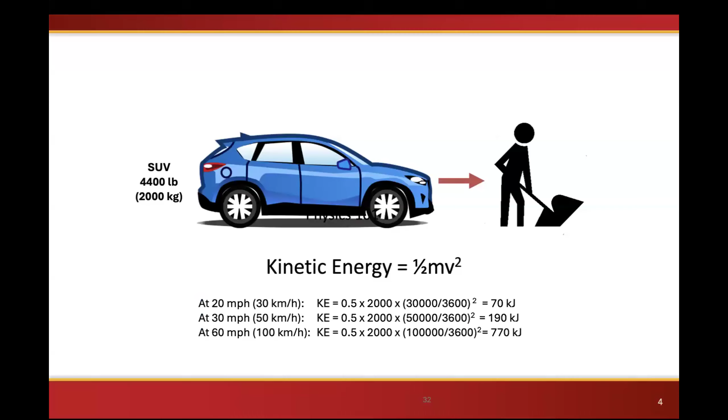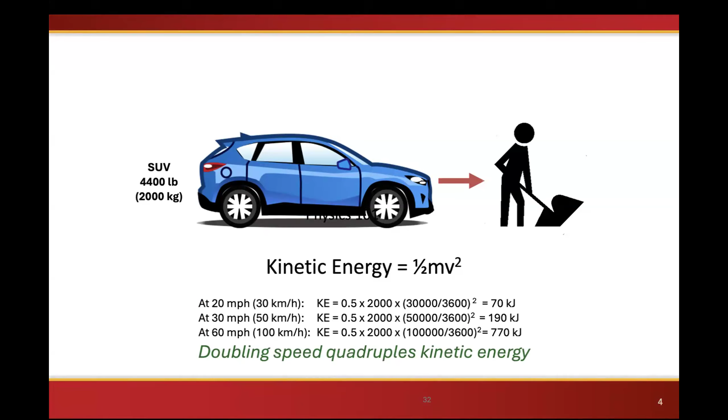And again, how we talk about this, how we have the common language, words matter. It's important. It's not my car hitting the pedestrian, it's myself driving and the speeds that I'm driving at and what is the effect on others. I do know that it is not possible to have 20 miles an hour on all of our rural roadways, but where does it make sense as we're looking at those safety risks that go along with it?

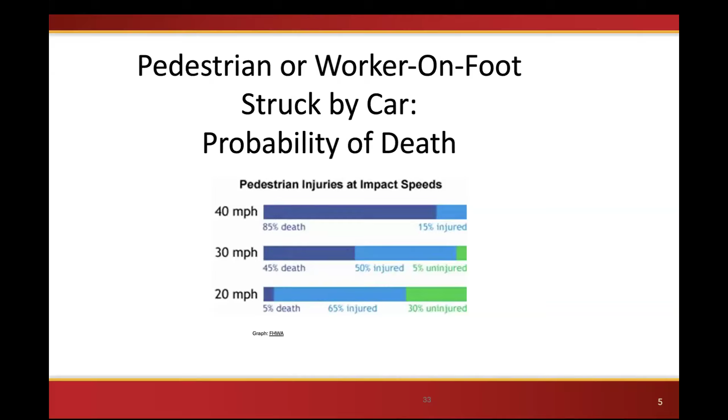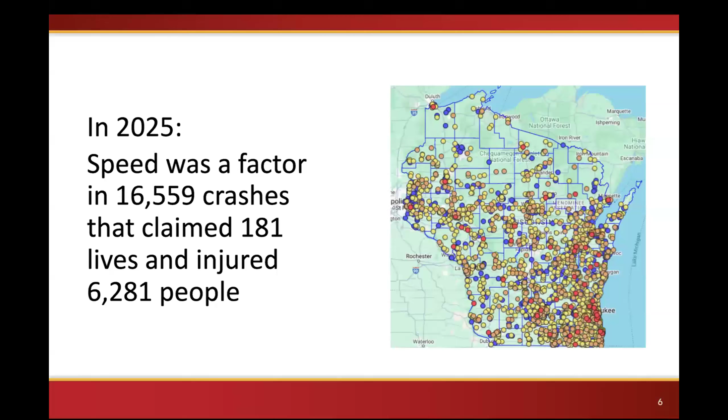As we are getting towards zero deaths in Wisconsin, we have to do better when it comes to speed on our roadways. When we look at the actual speed on our roadways, we have a lot of continuous data counters throughout the state. What we see here is roughly 3 out of every 4 vehicles are above the posted speed limit. Digging into that a little bit more, where does that break down? I have a whole speed soapbox, so bear with me here on this one.

Especially in Wisconsin, the speed limit is the maximum. So I know we say, okay, well, 5 miles an hour, Andy, is okay, and 9 is fine, 10 you're mine from a law enforcement perspective. But if we're just looking at the data, we see here in 2022, 76% of our vehicles were over the speed limit. When we look at our 20 plus, with limited data, you do see that spike in the COVID timeframe, but we're right back down to 1.74% on that large side.

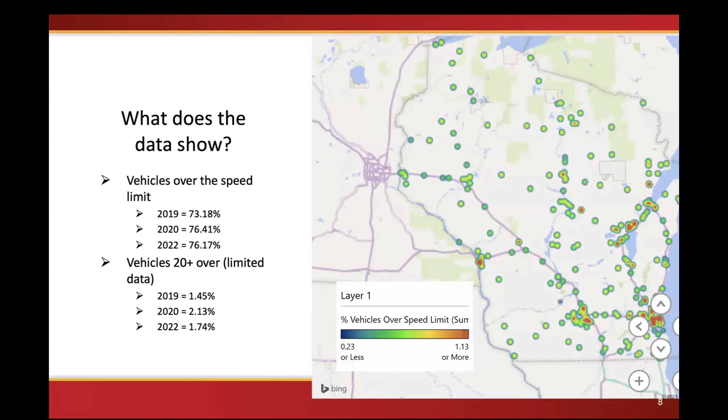So at least in my area, it's how do we start to think about not just that excessive speed? We always get into this: well, Andy, I'm a very good driver. It's not my fault. I can travel safe at 5 or 10 miles an hour over. It's those people that are always excessive speeding that are causing the problems. Yes, they are, but it's also all of us. And how do we look at that culture that we have?

So we're going to keep that excessive speeding in the back of our mind, but I want to set that aside for right now and talk about our everyday life and things that we can do. I've had the opportunity to do a Mentimeter with a lot of different groups: different types of judges, driver education teachers, engineers, law enforcement educators, and analysts, and asked them their opinions about speeding.

We asked questions such as, if the speed limit's 25 miles an hour, at what speed do you normally travel? It's anonymous, so they felt comfortable giving their answers. A little bit of a shot to the heart was that no one said they traveled right at the speed limit. At 25 miles an hour, people felt pretty comfortable going about 5 to 7 miles an hour over. On our interstates at 70 miles an hour, people felt pretty comfortable going 12 to 15 miles an hour over.

Well, we looked at it, and it didn't matter about your background, but speed perception varied by audience. We did see a difference between the public versus professionals. Overall, people underestimated the risk at moderate speeding levels.

Again, it's my old age showing, you guys can't see my gray hair, but it's kind of that Rain Man syndrome of, I'm a very good driver, Andy. It's everybody else that's causing it. I feel like I'm very competent at speeds where I can do it, not understanding the full data about it.

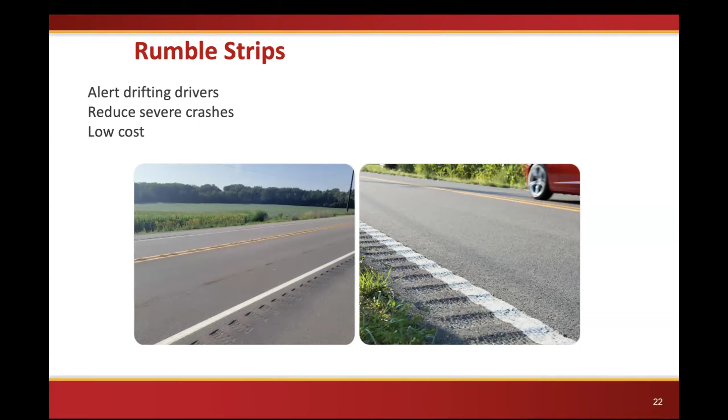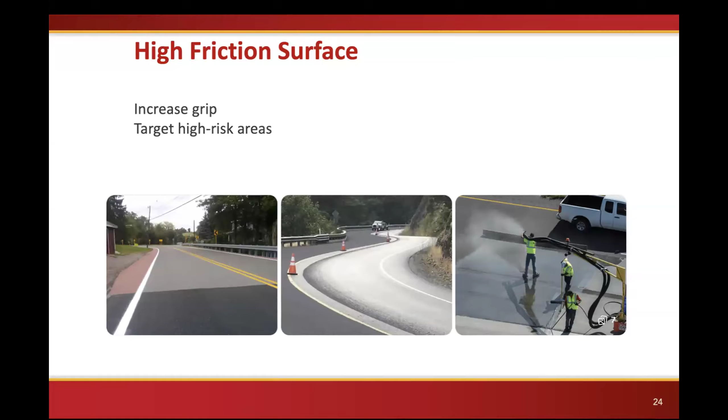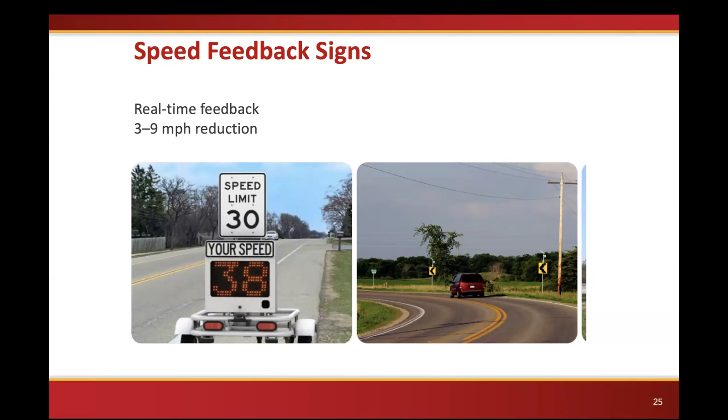I had an example of a sheriff who said they could see about 2 o'clock every weekday there was a car going through at about 120 miles an hour—over. They said, well, maybe that was a glitch for a couple days. Then they said, okay, we're just going to assign an officer out there. There was somebody coming home from work who always sped on that roadway. So they were able to utilize the data and look at it. They couldn't give a ticket based off what they saw from the data, but they could know when to enforce and what they should be looking for. So again, another helpful piece in being able to look at that. We can't have enforcement everywhere in our rural areas, but are there ways to do some targeted enforcement based off some of this data and analysis?

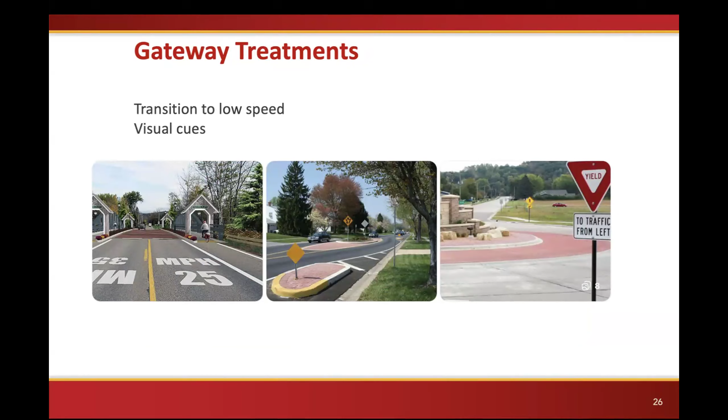In a lot of our rural areas, we go from a rural highway into a more city, village, or town setting. There are different options to transition to a lower speed roadway—we can do some roundabouts, some signage, elongated pavement markings, and other options like chicanes that are out there. So as you're thinking about your roadways, those two-lane rural roadways, and as we're transitioning to something where we know we're going to have a lot more interaction with our pedestrians and bicyclists, how do we transition and look at those options?

Take a deep breath. I get really excited about this stuff. There's lots of technology out there.

As we think about this and look forward to the future, how does this work? There are active and passive intelligent speed assists out there, different examples of this, and different studies that have been done nationwide with regards to this. There's also just cities and towns that are looking at slower speeds in general.

Are we seeing all of the vehicles down to 20 miles an hour yet? No. Are we seeing a statistically significant decrease of about 3 to 5 miles an hour over the previous years? Yes, and it continues to go down. So we're seeing that decrease.

I know it's easy to say, well Andi, we can just put up signs, no one's going to listen to it. But again, over time, changing that culture along with the enforcement, the engineering, and the education changes that culture that goes along with it. The other option is looking at different pieces of technology.

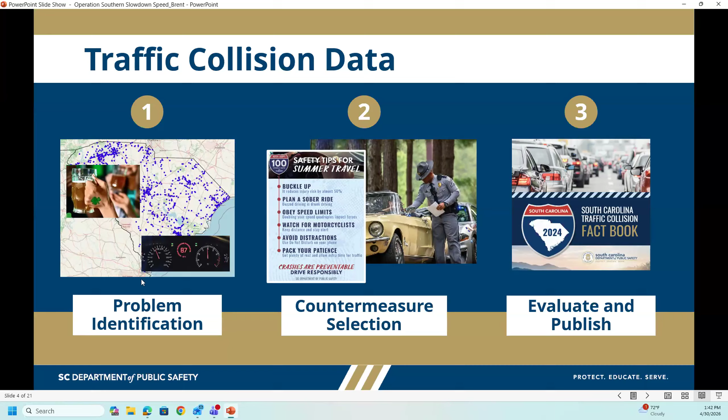And then we take this problem identification and this countermeasure selection, and then we include it all into our fact book. And that's where we evaluate the data. We evaluate the crash data in the state, and then we publish it to let everybody in South Carolina, and whoever else wants it, be able to see where our problem areas are, and they can use that and take it to their own jurisdiction and maybe implement their own plan, or maybe implement their own campaign and be able to target the areas that they are having issues with in their jurisdiction as well.

So in 2025, these numbers are preliminary, but as you can see, we had roughly 136,000 collisions, 945 fatalities, 16,000 DUI citations, 63,000 seatbelt citations, and 245,000 speeding citations. Again, these are just rough numbers that I wanted to share with you.

But one thing where I think we fail a lot, whenever we're trying to educate and talk to the public about highway safety and things like that, is we fail to share the economic cost involved in a crash. And that's one thing I encourage my guys to do, whenever they're doing a safety presentation or have the opportunity to talk to somebody, is to include this, because I think this is a big eye opener. Because people just look at the crash data and they think, okay, unfortunately somebody was seriously injured, or unfortunately somebody lost their life, but they don't look at the overall picture.

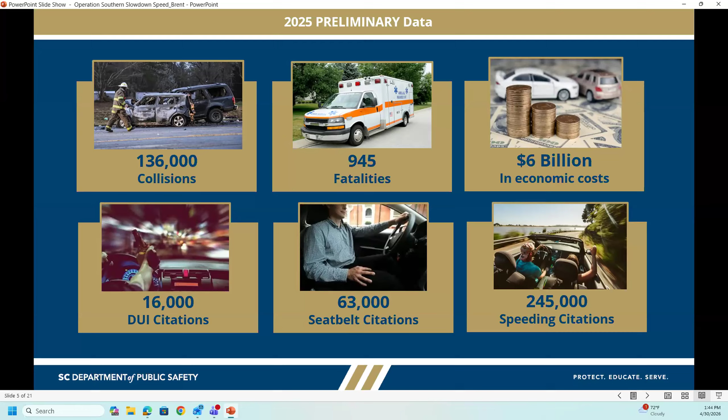And economic costs include medical bills, vehicle property damage, hospital costs, lost wages, decreased productivity, legal and insurance fees, societal burdens, public health support, long-term disability, things like that. And as you can see, the 2025 preliminary number for that was $6 billion. And like I said, that's a real big eye opener for a lot of people, because they don't look at the cost involved in a collision. So that's what we try to share any chance that we get as well.

And so looking at some crash data trends for us here in South Carolina, as you can see, we went all the way back to 2014 to show what we've done over the years. And, of course, 2014, 823, and then we saw an increase from there up. But in 2021, we saw our highest number of fatalities on record for the state of South Carolina.

And then after 2021, it starts decreasing a little bit. I've also included the serious injury graph there for you as well. The graph is almost identical, as we all know, and I'm sure your graphs and your data are probably similar too for your serious injuries and fatalities. But as you can see, we have started doing better over the last couple of years.

But 2021, I think everybody had a problem that year. At least I know our part of the country had problems that year regarding fatalities and serious injuries, and just an increase in everything, because we all know why. If y'all dealt with the same thing that we dealt with whenever COVID hit in 2020, and I hate to keep bringing that up because I'm really about tired of talking about COVID, but for us, that was the issue, and that's why we saw the increase in 2021.

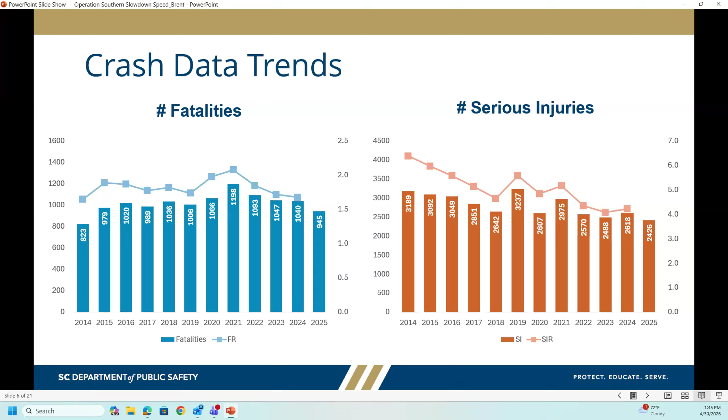And the reason being is because a lot of our agencies were told, only do traffic enforcement on those major violations. So I think a lot of people, like I said, in our part of the country were doing the same thing, and that's why we saw that increase during that time frame.

So as far as our traffic fatalities, we are third in total fatalities, and this is per 100 million vehicle miles traveled. So that's what we compare this to, and this is nationwide. So South Carolina, we're ranked third in total fatalities. We are ranked first in alcohol impaired driving fatalities. We are first in speed related deaths, third in pedestrian deaths, eighth in roadway departure deaths, eighth in intersection related deaths, and ninth in unbelted occupant deaths. And again, that is based off the 100 million vehicle miles traveled.

And it's always good to be in the top in a lot of categories, but these are categories that we're not very fond of, and we don't like being in the top of. So again, this is another reason why Operation Southern Slowdown is very important to us as well, to encourage our law enforcement partners in the state. I know this campaign is only for a week, but we always encourage them, don't stop during that week. This is something that we just need to continue to do throughout the year. We still need to work together and partner together to keep up with the speed enforcement throughout the year, because we don't want to be at the top in these categories.

So we use a lot of our strategies based off of our strategic highway safety plan, which Andi mentioned as well in her presentation. So we do the same thing, I think, just like a lot of the other states do. I'm not going to sit here and bore you on the SHSP, because everybody has one, everybody's familiar with it. But we use that and share that with the public and with our stakeholders as well. And we partner with them, whether it's DOT on the engineering aspect, or the Department of Motor Vehicles, to keep that partnership to help maintain our roads and make our roadways safer. We do that by using this plan.

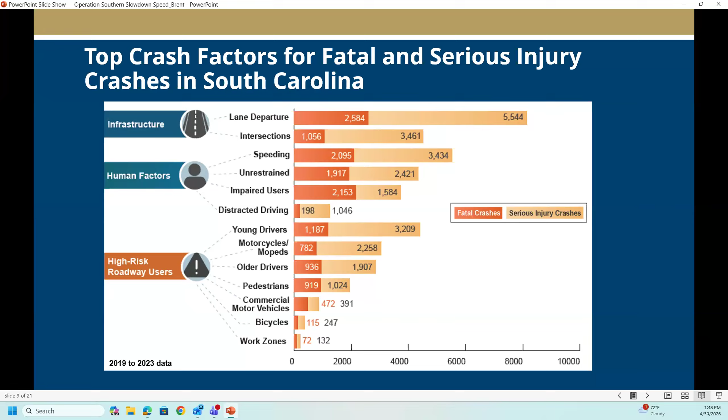So our top crash factors for fatal and serious injury crashes in South Carolina, as you can see, speed is at the top, like I mentioned a couple of slides prior. Five years of crash data were examined, focusing on fatal and serious injury crashes for the top factors. The factors are our emphasis areas. The overlap in contributing factors totals more than annual fatality and serious injury counts, because a crash can have more than one factor. And speed is our number 2 emphasis area, and is also the area with the greatest potential from a safe system approach, because of the number of countermeasures available from education, engineering, and the enforcement component.

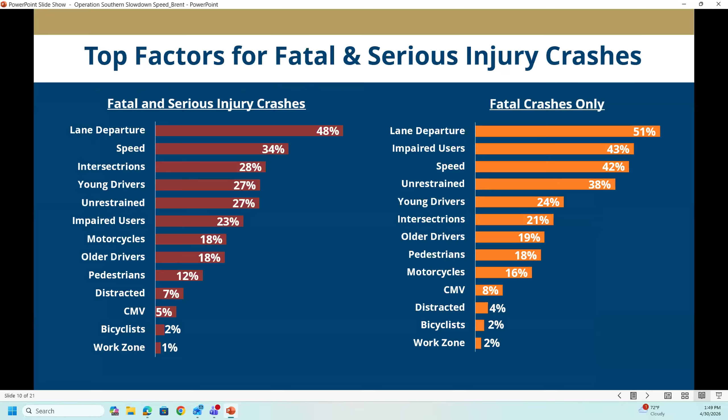And this is the same as the previous slide that you just saw. It's just shown in a different way. It may be easier to understand, simpler to look at this way, but it's basically the same slide that I just showed you and explained.

So the safety features that a lot of the companies and a lot of the manufacturers are putting in vehicles now are definitely safety features for the occupants inside the vehicle, but we have to think about those other types of roadway users outside of the vehicle. And so we've got to look out for those vulnerable roadway users on our highways as well.

And that is including our pedestrians, our bicyclists, our motorcyclists, and things of that nature. And what we consider in our other category, whether it's e-bikes or golf carts or things like that. So speed can come into play involving those vulnerable roadway users as well.

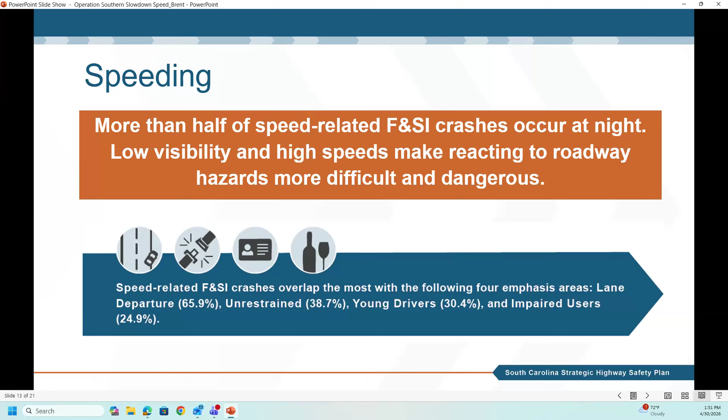Lane departure, which is for South Carolina 65.9%. Unrestrained is 38.7%. Our young drivers is 30.4%, and impaired users is 24.9%. So you take those top four and include speeding in that, and those are all related to our fatality and serious injury crashes on our highways.

So what everybody wants to know: all right, we do this campaign, we do it yearly. We've been doing it for almost 10 years now. Does it work? So our crash evaluation of Operation Southern Slowdown. We went back 3 years. I did 23, 24, 25, just to have a comparison to show you.

Now, in 2024, unfortunately, we saw an increase, and I'm sure somebody is asking, well, why did we see an increase? Well, I don't know. I really can't answer that. I went back and tried to think, did we have something going on during that time frame? Did we have a major storm come through in 2024 that pulled a lot of our officers in another direction where they had to be assigned to do something else? Was it a trend across the region?

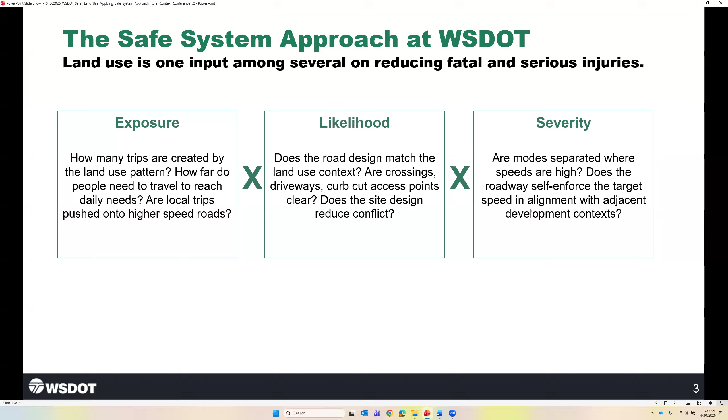And so the takeaway here is that land use can help us understand the exposure and operating context, and certainly acknowledging that design, speed management, and modal separation help influence the crash likelihood and severity. This is another way to show the connection between land use and the safe system. And so land use helps inform, again, the exposure and operating context, while roadway design, speed management, modal separation, and compatible infrastructure are tied to likelihood and severity.

And for exposure, land use can help us think about proximity: housing, jobs, schools, services, parks, daily needs like healthcare, et cetera. Are these located in a way that reduces some trip lengths or supports more travel options? For likelihood, land use helps us understand whether the transportation environment matches the surrounding uses. So if a road is serving schools, businesses, homes, clinics, or parks, does the design reflect that? For severity, land use helps us identify where lower target speeds, modal separation, or additional protection measures may be needed, especially where vulnerable users are present.

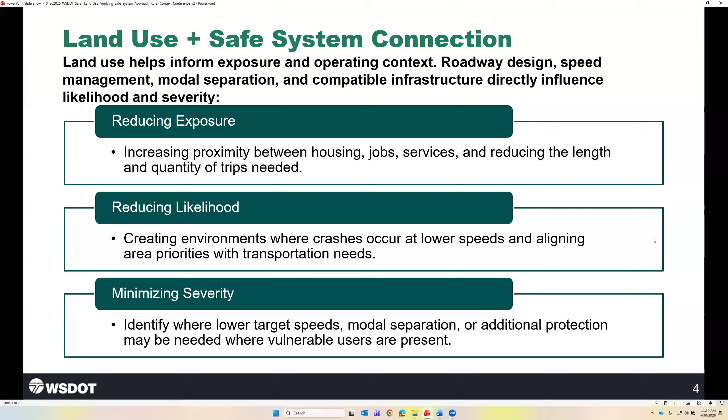So again, this is not about saying land use in any way solves safety by itself. It certainly doesn't do that. It is more about using land use to help understand safety, speed, and design considerations earlier in the process. Why does land use matter for the Washington State Department of Transportation? This is one of my favorite slides and favorite topics here. And so why is WSDOT talking about land use?

And the reality is that our agency owns and operates and maintains billions of dollars of public assets that are affected by land use decisions happening on a daily basis. The agency helps to fund and plan and participate in the permitting and delivering of projects that are shaped by the communities in and around them. Local land use decisions affect how people across the entire state of Washington access the state system, where growth occurs and how much traffic is generated, where people walk or bike, and how communities interact with the state highway network.

So the Washington State Department of Transportation has a really unique opportunity to help support local land use and housing efforts and economic development efforts, public health, safety, and mobility goals through being a part of this coordinated planning and guidance process. And that is why land use matters for the Washington State Department of Transportation. It helps us better understand the context in which our transportation system is operating.

The origin of this work at the agency really connects back to the Washington State Strategic Highway Safety Plan and our Target Zero efforts. And this plan made an important point that transportation safety starts with how we build. Land use policies and regulations influence how people get around and how safe those trips can be. Location matters as well. The design of neighborhoods shapes travel choices, the length of the trips, and the options available for folks to travel. That is the foundation for safer land use. It recognizes that transportation safety is much more than just about the roadway itself. It is also shaped by the places around the roadway and the underlying rules and regulations that produce those places.

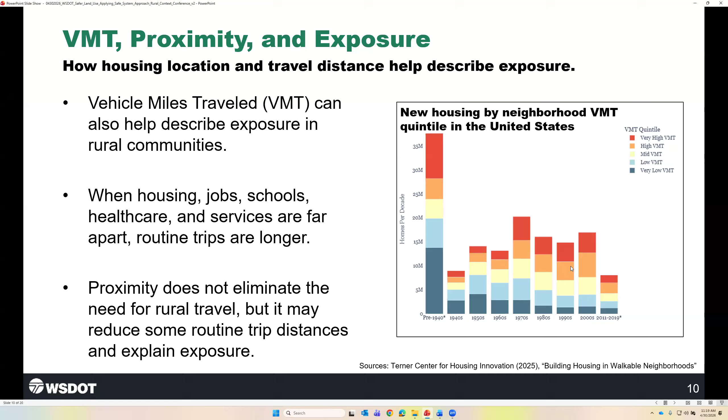And so this is not intended to be used as a safety outcome study. Rather, it can be helpful to support a more narrow point that where housing is built influences how much people may need to drive as well. And so from a safe system perspective, that matters because VMT helps describe exposure, and exposure is one part of the safety picture. Where does land use show up in rural safety work?

Most, if not every jurisdiction, no matter the population, has some set of regulations, a framework, or a code that regulates the development process—what gets built, how it gets built, where it gets built.

It often shows up in the rules and standards that shape development before a project is ever built. Zoning codes determine what uses are allowed, where they are allowed, how buildings relate to the street. It accounts for things like setbacks, lot size, lot width, lot depth, lot coverage, and off-street parking.

Subdivision regulations shape how land is divided for new developments. They influence lots and blocks, street layout, and even connectivity. Engineering and public work standards determine how the infrastructure is built, including the cross sections, lane widths, the requirements for sidewalks, shoulders, curb gutter, utilities, lighting, lumens, and construction materials.

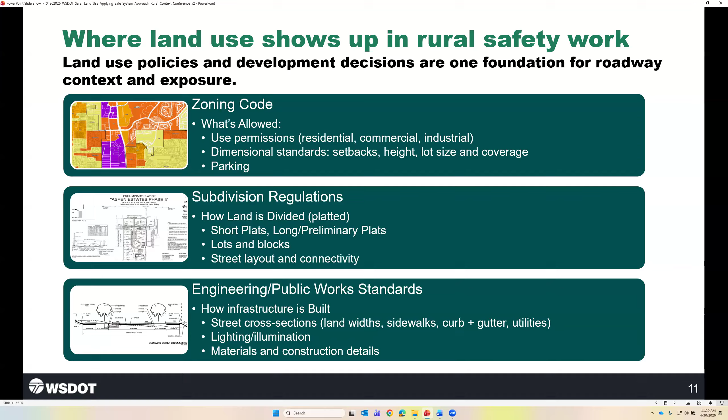These rules matter because they shape the roadway context that those working in transportation agencies and safety later need to respond to. They influence where access points are located, where streets connect or don't, whether people have direct routes to daily destinations, and whether alternative transportation modes are available or feasible. The intent of this slide is to demonstrate the underlying rules and regulations that are a primary input into so much of what we see surrounding our transportation context.

I wanted to highlight two smaller community examples. These communities may not have used the phrase safer land use, and these are not crash outcome case studies, but their code updates align with safer land use principles and concepts because they shape connectivity, housing, and the built environment.

Ellensburg, Washington is a central Washington community located along Interstate 90. It has just under 21,000 residents, and it has recently changed the rules to allow more housing, more missing middle housing, which is happening across the country. But what they also did at the same time was update the subdivision design requirements to prioritize connected street networks, with maximum block lengths and facilities for pedestrians and bicyclists.

The value from a safety perspective is not that the code alone solves safety outcomes. The value is that the code helps create a more connected and predictable development pattern that can support shorter local trips and safer multimodal options.

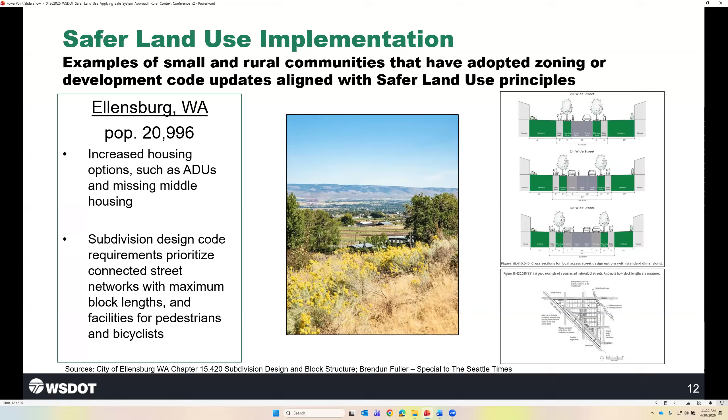Bastrop, Texas is a really interesting example. It's a smaller community in Texas with less than 10,000 residents. In 2023, they went through a comprehensive community outreach process and adopted an entire new code titled Building Bastrop. The city used a form-based approach, which is different than traditional zoning and development design standards—it's based on form, and established the street grid as the framework for growth.

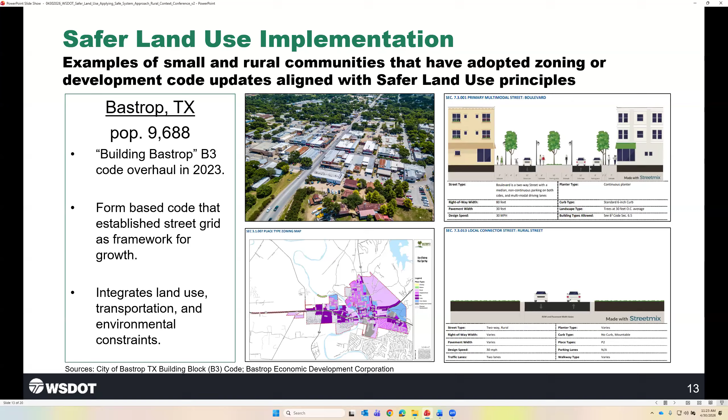It's very unique these days. The code integrated land use, transportation, and environmental constraints into the development review process. Again, the point is not that zoning reform automatically produces safer roads—that's not what we're saying. The takeaway is that development rules can shape the future transportation context. For agencies, that matters because those rules eventually show up as access points, crossing needs, frontage conditions, street connectivity, or multimodal demand.

From a WSDOT perspective, this connects directly to the work that our complete streets and active transportation team is doing. Safer land use is still relatively new for the agency, a newer formal concept for us. But many teams and staff have already been working with these ideas in practice, looking at context, access, active transportation, and for WSDOT, the way state highways function and interact with communities.

I wanted to highlight two examples from Odessa, Washington, and Chewelah, Washington. These are not presented as completed safety outcome case studies. These are examples of how the agency is using this approach to evaluate active transportation access and roadway context in some of our rural communities in Washington State.

In Odessa, State Route 28 and 21 crisscross throughout the community, running through the city. This project is intended to rehabilitate both state routes within city limits. The safer land use connection is that the road is not only a regional route, it also serves as a primary local access corridor for residents and services.

From a speed and design perspective, questions arise about where the roadway should communicate the transition as it goes from a rural highway corridor serving higher speed traffic to a main street or town center context with active transportation needs. That's practical in bringing land use into the conversation—it helps identify where the function of the road changes and where design may need to respond.

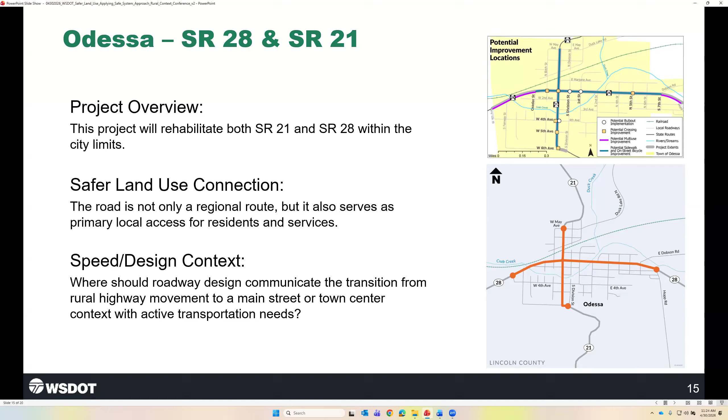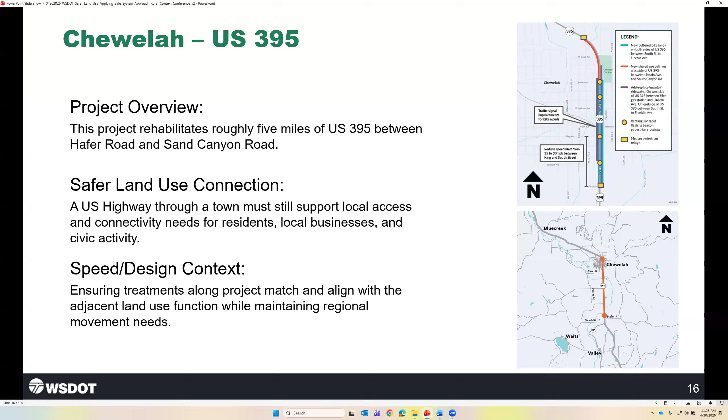Another example is Chewelah, Washington. US 395 runs north-south through the community. The safer land use connection here is that a US highway still has to support local access, businesses, and civic activity while also serving as a major route for state travel. So the speed and design question is how to align these treatments with adjacent land use and local access needs while still maintaining regional movement—a challenge many rural communities face. The goal is to make the road fit the context it's serving.

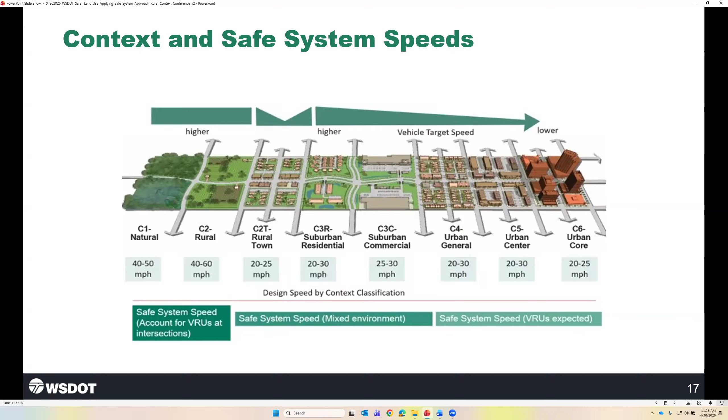This connects to ongoing work at the Washington State Department of Transportation related to context-sensitive speed setting. WSDOT is looking at how built environment patterns can inform speed setting and speed management conversations across the state—asking how different roadway and land use contexts should influence target speeds, speed management approaches, and the types of protections needed for different users of these facilities. As part of this effort, the agency is building a statewide map based on built environment context, which is one of the places where safer land use becomes more practical, because it connects land use, roadway function, user experiences, and safer speed decisions.

I want to talk about how safer land use is being integrated into WSDOT programs, planning efforts, and reporting. Safer land use will be part of our upcoming amendment to the statewide highway system plan. It's also being integrated into our legislative work to reduce per capita vehicle miles traveled, where WSDOT continues to evaluate the relationship between vehicle miles traveled, exposure, safety, and transportation outcomes. Safety and context are also part of WSDOT's work on multimodal level of service.

This is a new legislative requirement where we are evaluating how to move beyond traditional vehicle-focused level of service measures and more appropriately account for multimodal access, safety, and roadway context.

Safer land use is directly connected to the ongoing context-targeted speed work I mentioned, and most recently was included in the just-published Safe System Approach for Speed Management handbook for local agencies in Washington State. It's also a topic we're beginning to share outside our agency—with local agencies, cities, counties, jurisdictions, and organizations including those in public health or Main Street and economic development. The highlight is that safer land use is not just a research or presentation topic—it's starting to be embedded into WSDOT's work, which is really exciting.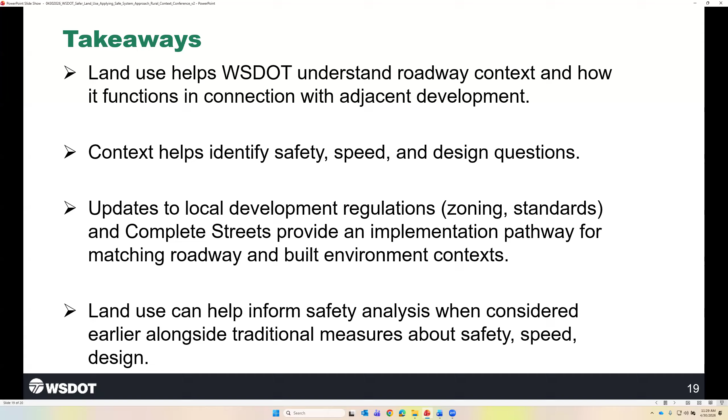And finally, land use is important, but it is one among several inputs. It does not replace safety analysis, as I said at the start. It helps ask better questions earlier, alongside traditional crash data, speed data, roadway geometry, access, and traffic volumes. Speed does not happen in isolation—it happens in a context.